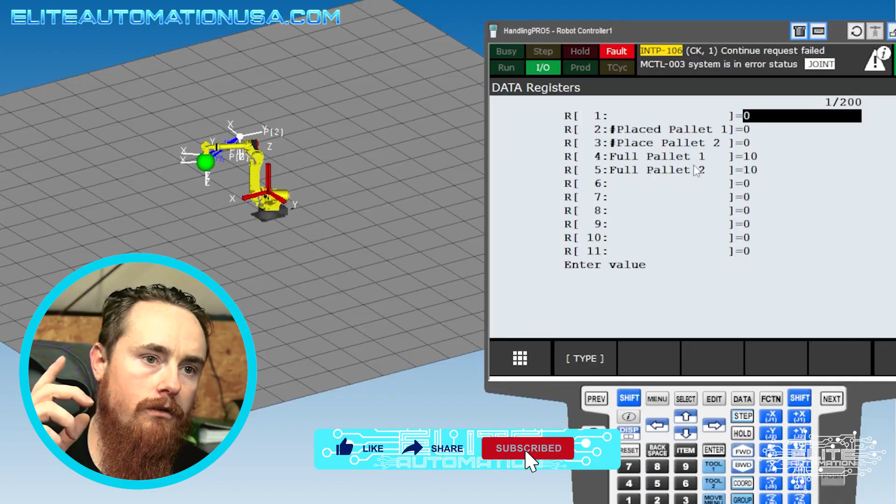This video is going to be just a crash course on Roboguide. We're going to go through all different types of things. It'll have a title that matches what we're going to talk about and multiple different titles to go with it. So we'll look at this program. One premise that we have of this program right now, we're just creating some generic loops.

The other thing is for a premise, if you go to data, you will see the registers menu. If you don't see registers, you might have to hit type. Make sure your shift key is off, hit type, and then click registers here if you're not on the screen already. But we created a couple of register descriptions here, placed pallet 1 and placed pallet 2, full pallet 1, full

pallet 2. And so register number 2 and 3 will be number placed on the pallet. So we're going to use these as counting registers. So we will basically increment every time the robot does a place to pallet operation. And so there's 2 pallets. So that's why we're placing to pallet 1 and then we're placing to pallet 2. Then we have the full pallet 1 and the full pallet 2.

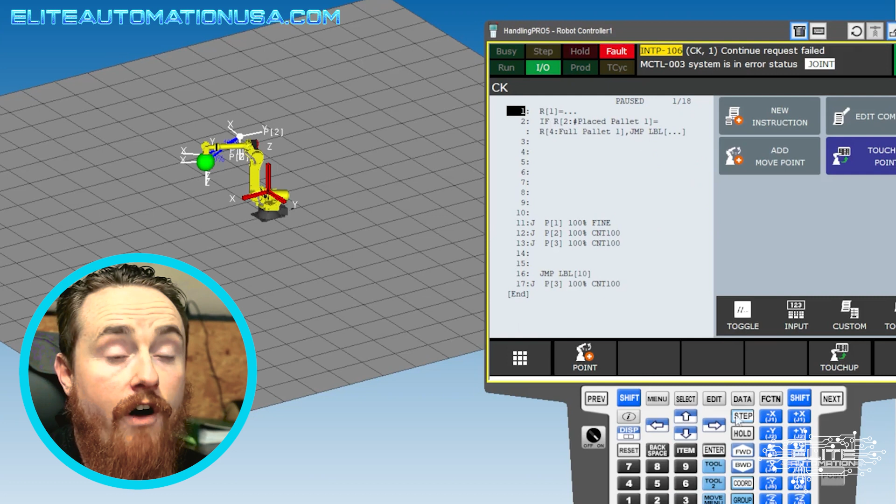Now the reason why we're doing this is to have a hard set number that we can assign to what is a full pallet, but also it's to show an example of utilizing registers. So, to try to give an example of what a register is and what the purpose of a register is. That's one of the biggest challenges with all this, figuring out what's the purpose and use case for these different tools like registers, digital inputs and outputs, group inputs and outputs, things like that.

And so in this instance, we're calling a full pallet 10, a stack of 10. So we'll stack, let's say 10 high, and then we'll move over to the next pallet and stack 10 more. Maybe we'll write a program that does something similar to that. Oh, so to delete an instruction, you have to go back to your line number over here. Then after you're on your line number, now you can go and change your teach pendant screen to edit command, delete. So go ahead and go back up to this if statement right here.

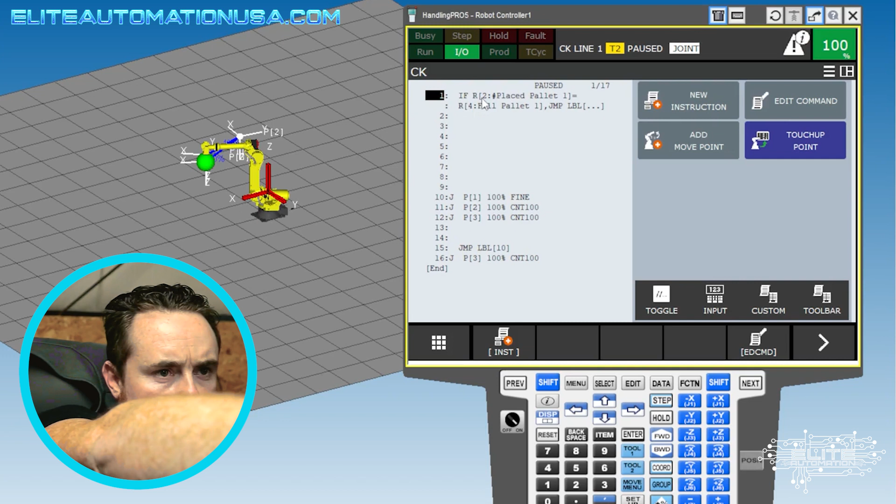So one of the thought processes with this if statement was we're looking at how many numbers of parts have we placed to the pallet, and then we are saying equal to full pallet. So notice the full pallet we set as a 10. And so one thing that could be done differently here is that this register 4, we could have just said equal to 10. So we could have said register 2 equal to 10, jump to label. But we didn't do that.

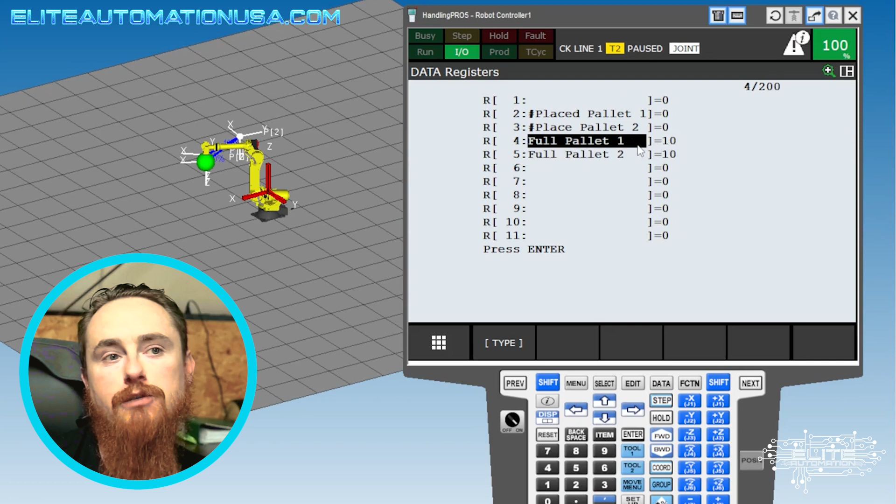And part of the reason why is it's not always the best programming practice, and you kind of have to determine when's the right time to do certain things. In this particular instance, we're using register 2 equal to register 4 to demonstrate the utilization of a register. And then to give another real-world example of why you may do something like this, you might have somewhere else in another program writing what a full pallet is. So you might have a PLC saying, this is the recipe value for this part number that we're running. Maybe you have boxes that you're stacking.

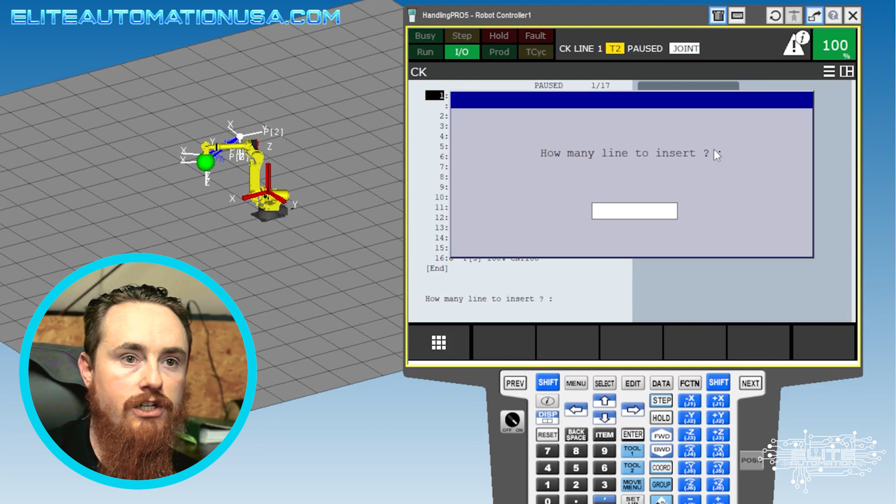It may be different size boxes. Maybe the big box you only stack 5 of them. Maybe the medium-sized box you can stack 10, and maybe the small box you can stack 20. So the PLC passes that information. The operator sets on the HMI, I want to run part number medium box. And so part number medium box is then told to the PLC. The PLC then passes a 10 for the full pallet amount. So we're just pretending that this value came from a PLC.

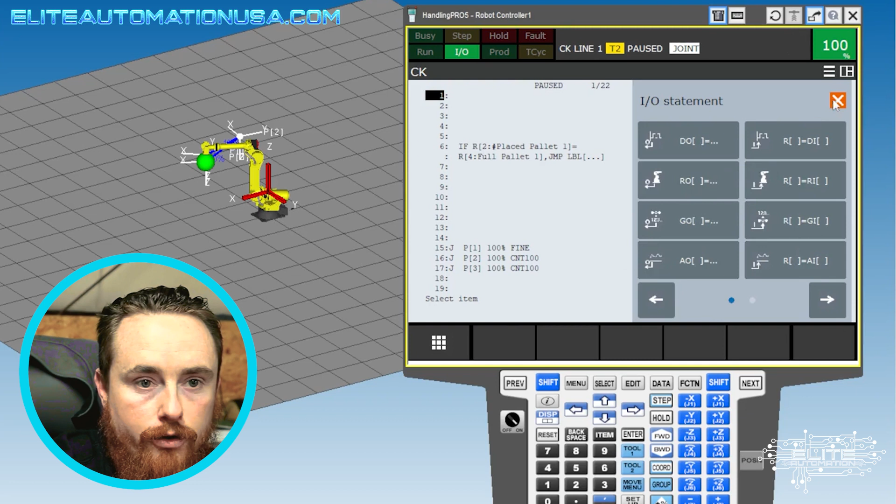And let me just write a quick example of what that would look like. So this is very useful, and you would definitely utilize something like this. Now a lot of times you do this in a different program. You wouldn't do this in the program that we're doing it in. And you just do that for programming practices. So we're going to insert some lines, 5 lines. And Gene, I'm just going to do this demonstration, and then I'll let you take back over again. So we're going to use the I/O.

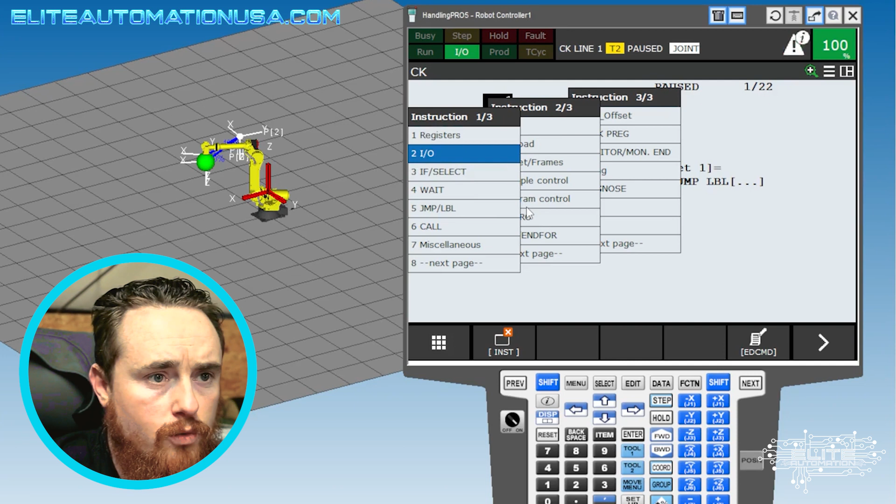Notice in these I/Os you have different types of I/Os: digital outputs, robot outputs, group outputs. By the way, that's the icon mode versus non-icon mode. Icon mode is like a newer user interface for the Fanuc robot, but almost all robots utilize this standard menuing system. What is it for? It's just a different layout. One's more of like a push button style, and the other is more of just a menu system. They're both menu systems, but this one's just a more generic version.

But this is what I'm used to programming on, and every single Fanuc robot will have this exact same menuing system for like the past 30 years. There might be stuff missing there, or there might be additional stuff now, but it's pretty much the exact same layout. Versus the other one, something that just got released. I mean, maybe it's been like 8 years now, but I still don't use it.

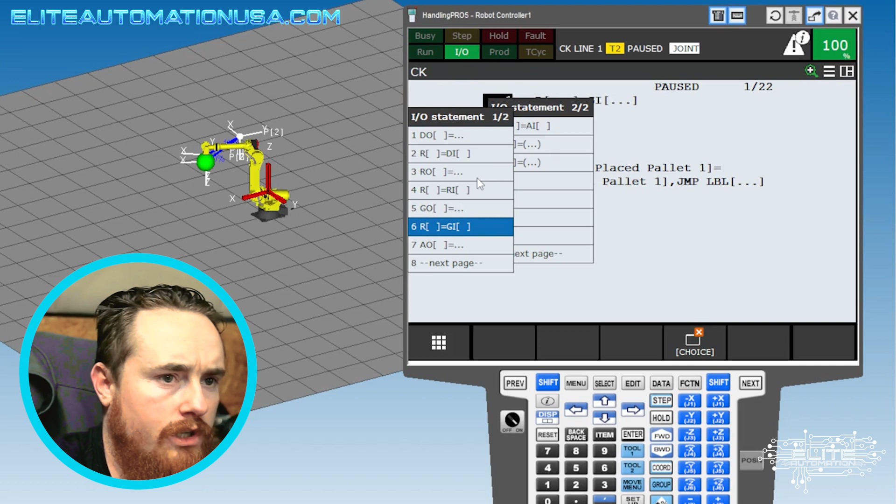So we're gonna go over to instruction. Then we're gonna go to the I/O. And if I'm not mistaken, this may not be available in some of the older programs, but this is now available as its own separate instruction. So register is equal to group input. So instruction, I/O, and then we will go down here to the register equal to group input.

So a group input would be what's utilized from the PLC. I won't say that you can't directly write to a register, but it's a lot less common practice. In almost all applications, you don't directly write to the registers. You write to a group input, and then you pass that group input data to the register, which is exactly what we're doing here. We have our full pallet amount, which is 10. So a full pallet amount is on register 4. And I'm pulling this information from right here, and over here in our data menu, register 4 pallet 1 full.

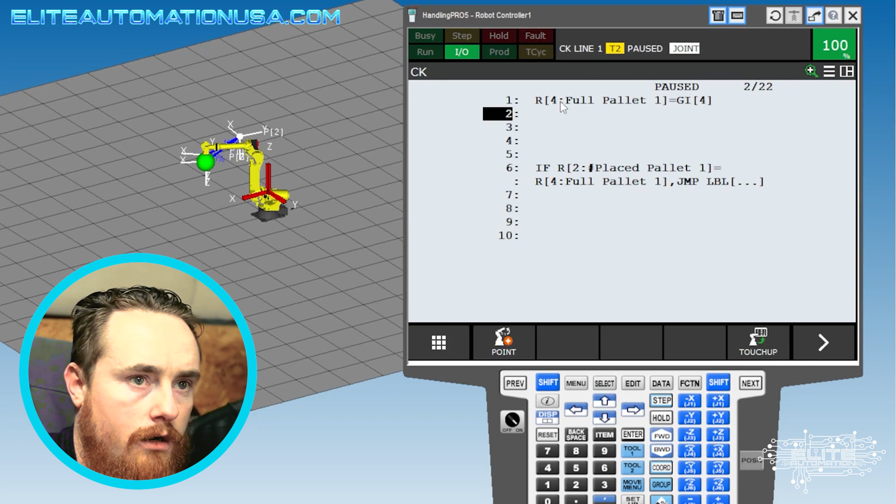Going back to our program, select enter. And then here, we're gonna set this register. This register should be 4. Yep. And then this group input, just for easy number's sake, and you should try to do this as much as you can in your programs, we'll make group input 4 as well. So you should create as much alignment in your programming as possible.

A lot of times in programming, you'll program in increments of 10s or 5s, so that way maybe register 10 will align with your group input 10, and you can have code that relates to one another in a relatable area. Or even if they can't be in the same data numbering system, because there's already something there, you at least want to keep all your data that's relative to one another close to each other. To give a more clear example, we use 2, 3, 4, and 5 all as our pallet place data. So that's pallet 1, pallet 2 data, and we have it all chunked together.

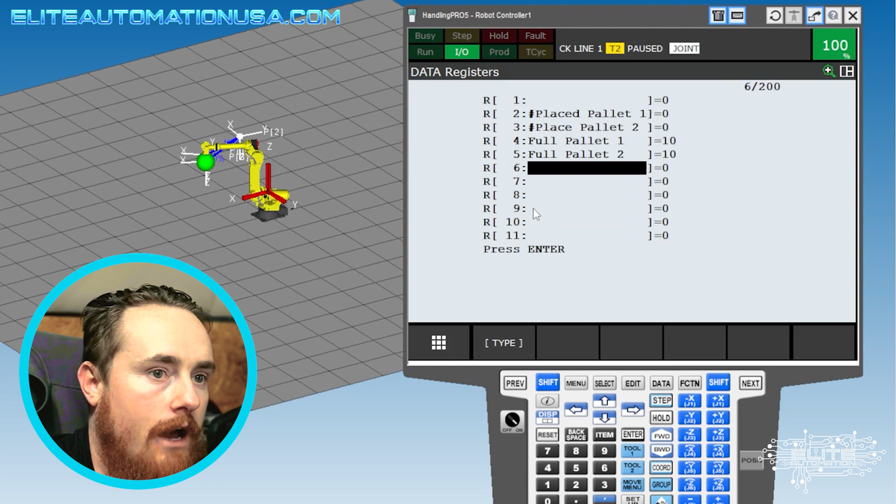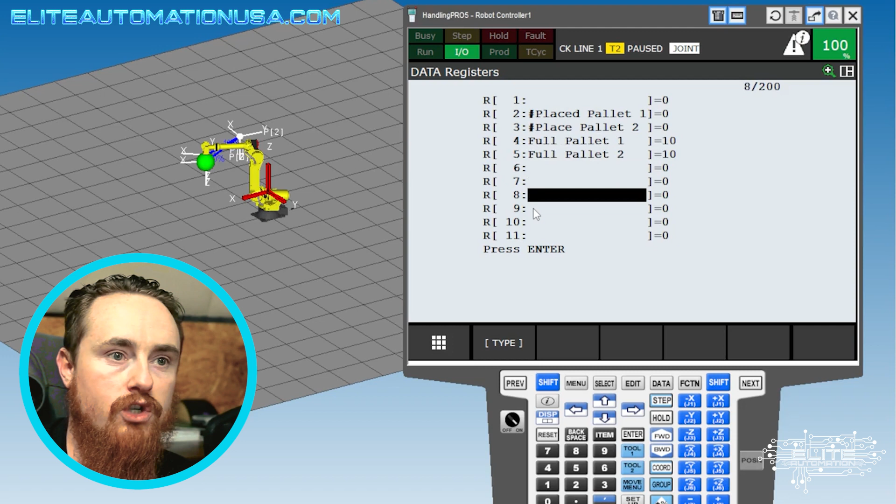You don't want to put full pallet way down here at line number 27 and then put another one here. You don't ever just choose random numbers. You always just select a number. Either you start at a 10 and go 10, 20, 30, 40, or you can do it by 5s. And you'll also do this depending on how much data you think you'll need. For instance, I'll say, okay, we only need 4 data points, so I'll only allocate 5 data points for this section.

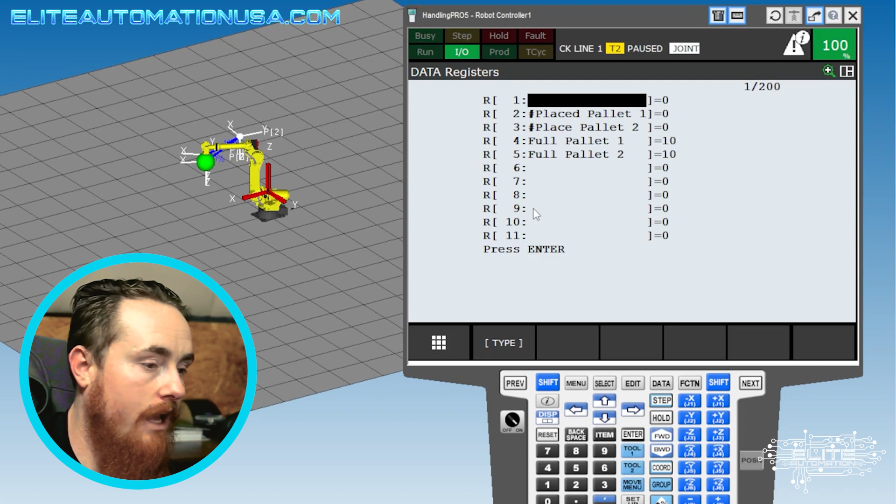But let's say we're talking about pallet 1 and pallet 2 here, and we had 10 pallets. We have 2 data points for each pallet, which means we need a total of, with 10 pallets, 20 data points. So we would know that we need 20 data points of space. If I started at 10, we would need to allocate all the way up to 30. That means don't put anything else in between 10 and 30, because we're gonna need that for our 10 pallets, if we're just pretending that we had 10 pallets.

So this is like a data organization thing, and it's extremely important to have this in mind while creating your programming and creating your data structures. The way that you can create your data structures is to identify the different parts of the application. So if you have a place pallet, how many place pallets do we have?

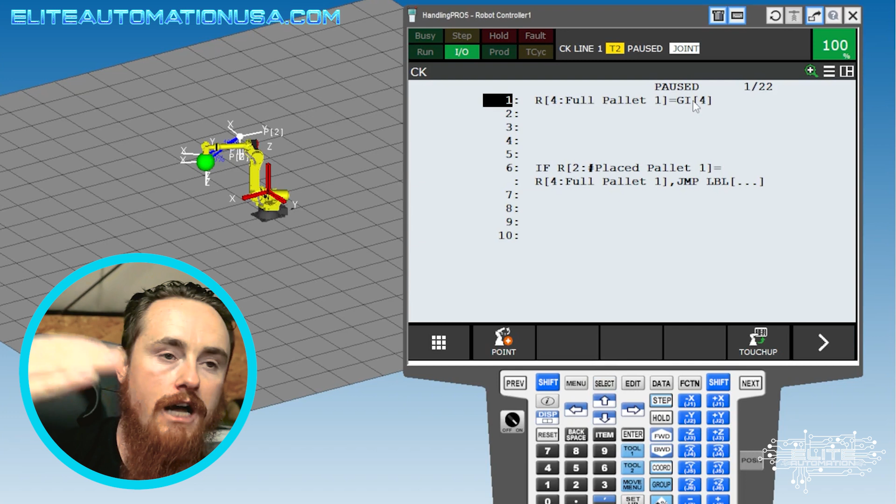Okay, we have 2. Do you have a pickup position? How many pickup positions do you have? 1 or 2. And then you can say, how many sensors do I have? So this helps you, you write all this out on paper or in a document, and then from there you can start distinguishing, oh, I'm gonna need roughly this many data points here and this many data points there, and you can create your data structure in that way.

Back to the program, so just select and then CK program. Okay, here we are. So register number 4 is equal to GI4, okay? I'm gonna go back to data. Notice we have it set to a 10. I'm gonna just do this for testing purposes. We're gonna go shift, step, forward. I guess we'll do a quick IO setup real quick.

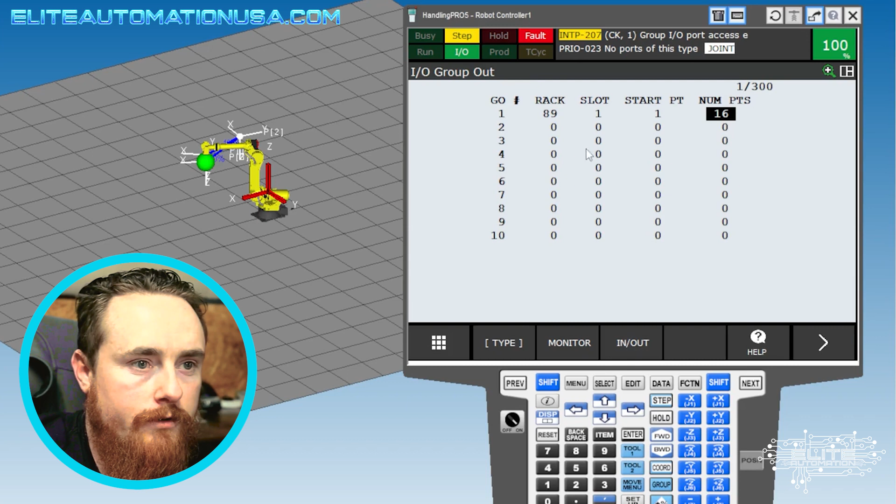So we'll go to the IO menu, type, group. So IO menu, go to type. Oh, okay, so that's why I did the type. IO menu, type. So we're inside the type menu, and then we'll 5 for group. Okay. I'm not gonna expect anybody to know this, but I just happen to know I can do like

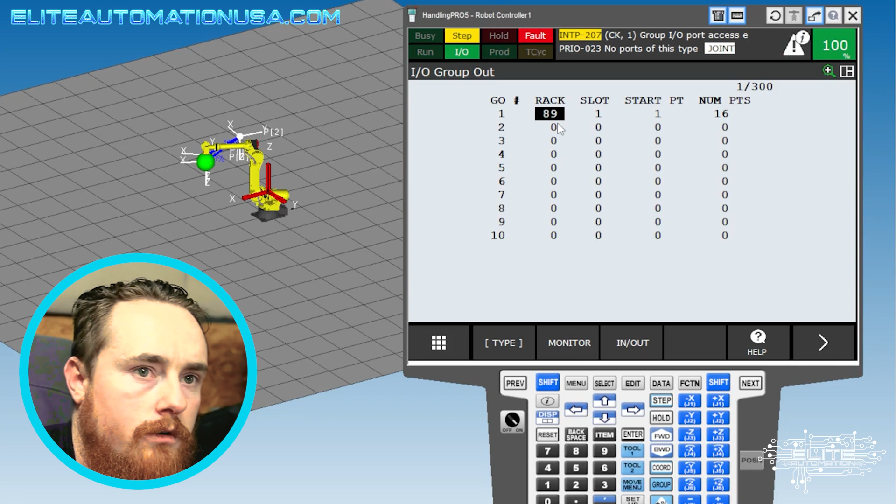rack 1, slot, oh wait, hold on, I think I got that backwards. I think it's rack 89. Slot 1, start point 1, number of points, 16. I can't really explain to you what I'm doing right here because there's a lot that's going on here. So where'd you get that number 89 from?

My brain, memory. But I'll tell you, when I say rack 89, it means Ethernet IP. I got you. Okay, so that means the robot is going to talk to a PLC via Ethernet IP. And these numbers are a hard set number. Fanuc tells you if you're going to talk to it via Ethernet, use rack 89.

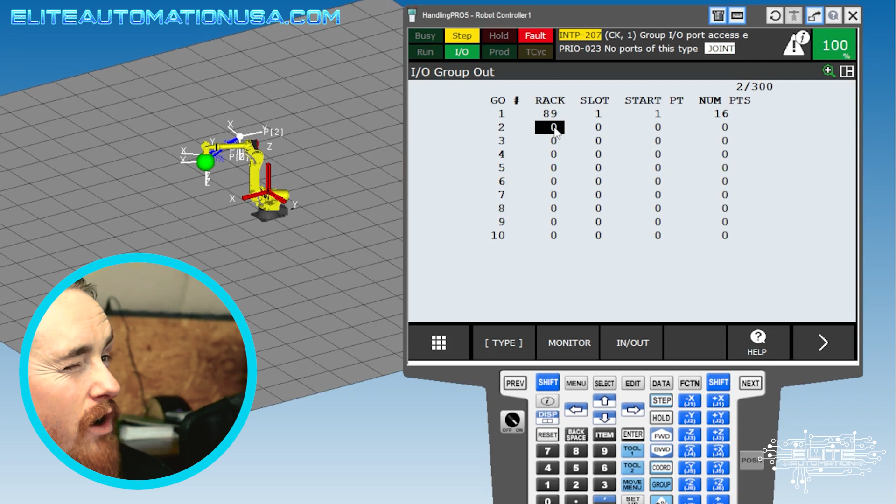Another time where you'll have different rack instances, I don't know these off the top of my head, but if you had a physical input card that had wires running into it, or a physical output card with wires running into it, those have their own rack number. So if it's an input card, I'll just say a random number, it's rack number 5. If it's an output card, it's rack number 6, like that.

And also, I had to refresh my memory, the rack number for the cards that are actually on the robot might be based on where they're actually slotted in the rack, potentially. Or the physical rack itself might have its own number, and then you just change what slot number it is. So you'd have a physical rack in there, like of a PLC basically. It's like PLC I/O, but a little bit different.

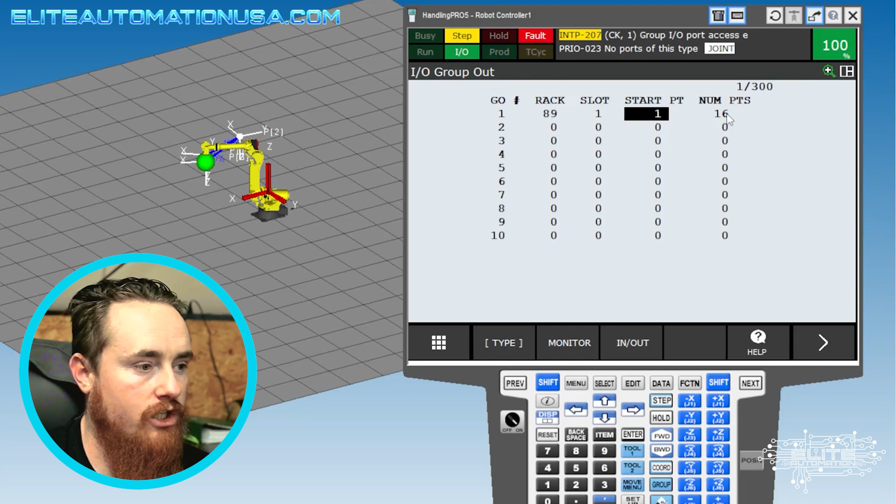You might have a single rack number for that entire rack, and then you would say what slot number. So if it was an input card, you may say slot 1 here, and the next one would be slot 2, slot 3, slot 4, okay? And then you're saying digitally, where do you want to assign this? Meaning, how much memory of the robot's computer do you want to take up, and where should it start?

So if we're talking about a number from 0 to infinity, I'm telling it I want to start at 1, right? And then how many inputs do we want to use? We want to use 16. And then, let's say for the next one, how I would do this one would be 89, slot 1. I might get this wrong because it's been a little bit of time since I've done this.

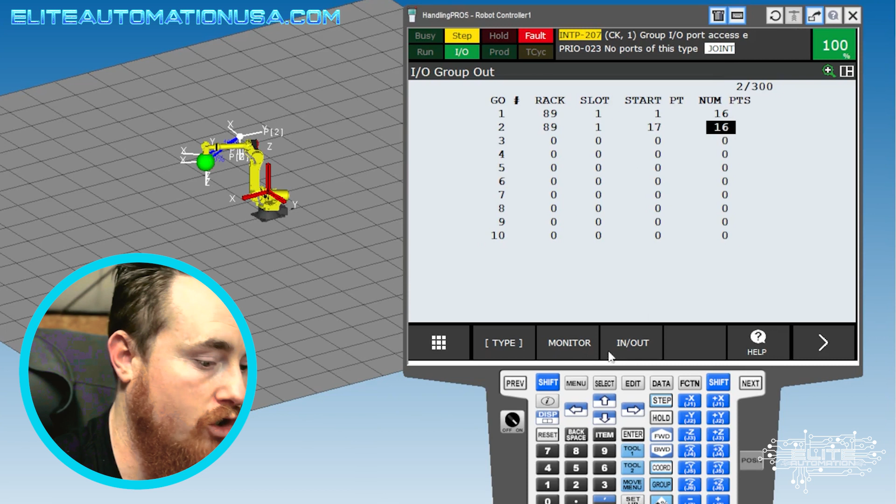So it wouldn't be a start point of 1 anymore. The reason why is because this is consuming 16. So we're starting at 1, it's going to consume 16 points. That means the next one has to start at 17. This one will also consume 16 points because it's group output data. So the group input data needs to be either an 8, 16, 32. I think it can only go to a 16 though.

But yeah, so that should be set there. So we don't have any set here either, so I'll just do the same thing. 89, slot... oh shoot. Slot 1, start point 1, number of points, 16.

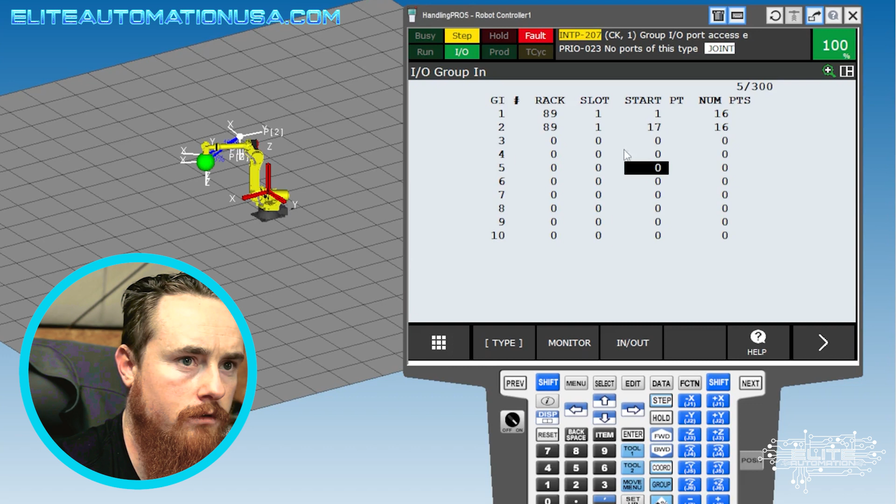And if I'm not mistaken, we're going to have to cycle power the robot after this. 89, slot 1, start point 17, and it's 16 points. Not positive. So you have the ability to cycle power your robot from here.

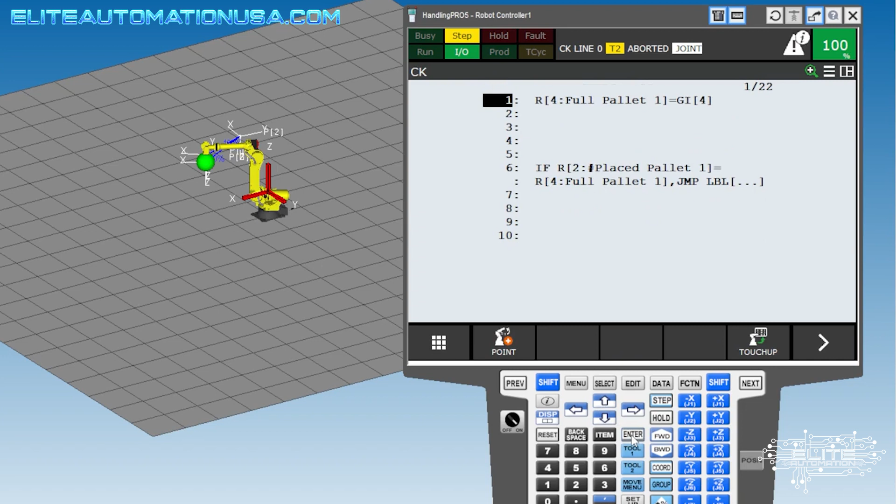Function, go over to this menu system, cycle power. This will cycle the power. Are you sure you want to do this? Yes. So it's going to cycle the power of the robot as if it were a real robot. You turn the controller off, turn the controller back on. Reset it. Yeah, cycle the power always means to turn it off, turn it back on.

So basically we're just going to change this back to what it was. Full pallet 1. I'm going to do something kind of silly just to do what I was trying to do, but do it extremely generically.

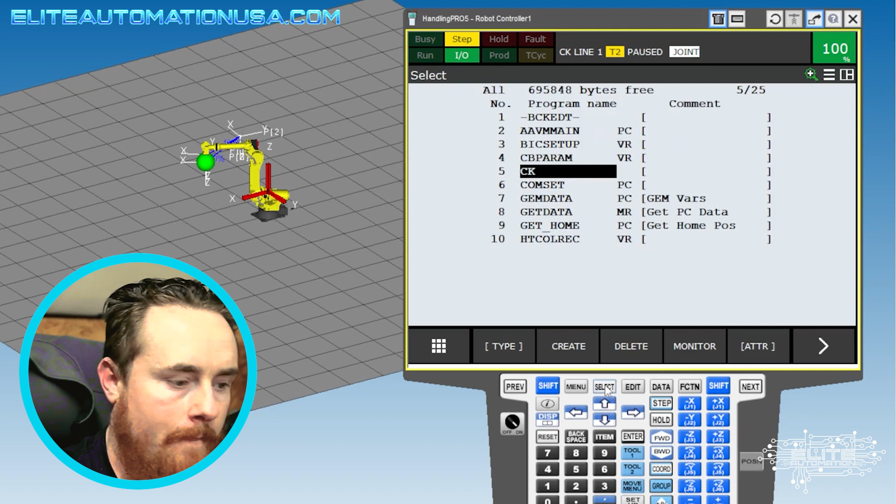We're going to say... option, keyboard, GI2 sim. So the reason why I did this is because we're going to act like this is a group input, because really there is no difference in the way that these act, at least at a surface level. We'll do GI3 sim, again, to match our register 2 and our register 3.

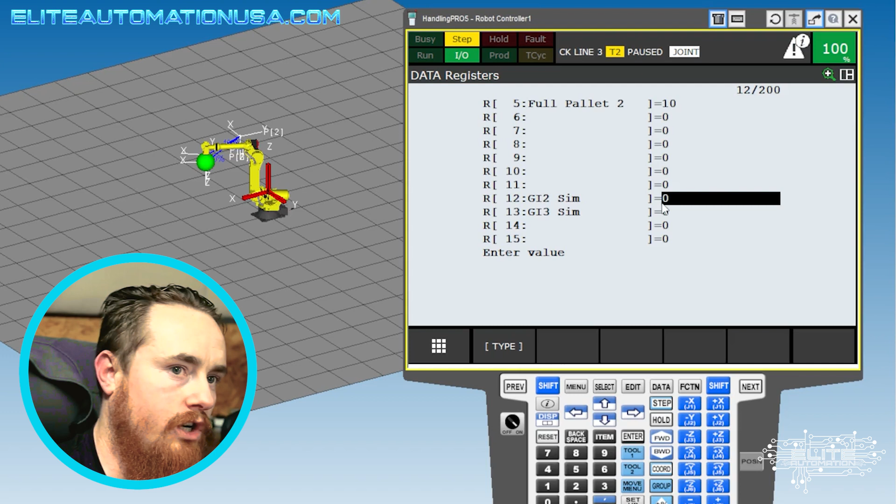So I'll go back to the program. Again, since I can't use this GI, we're going to change this GI back to a register, and then we're going to use my GI2 sim. So now, when we run this program, I'll just run a quick test - shift, let's go look at data first. So you see our data, we have 10 and 10 set. Back to our program, shift, forward, okay, go back to our data.

Notice one of our 10s got shoved to a 0. How is that? Because down here, our register 12 is a 0. So let's just say, for this instance, the PLC sent it a 0 for some reason. So we're acting like the GI2 is coming from the PLC. Let's say, I was given the example of a small box or a big box - we can only stack 5 of them there, and a big box we can stack 10.

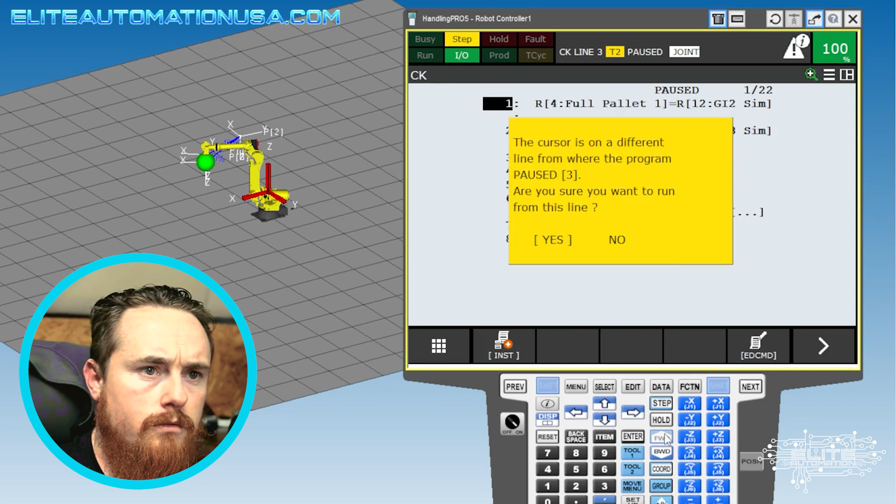So these are coming from the PLC, and I'll just go ahead and write this out real quick. Edit instruction, register equals register. We'll do register 5 is equal to register 13. I'll use this one up here, which is our GI3 sim.

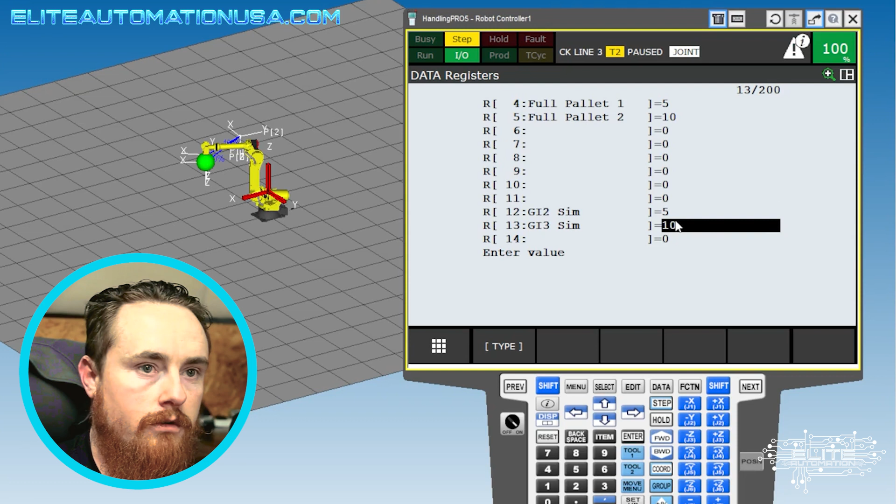So now if I come back up here to the top again, shift, forward, yes, forward. Now we go look at our data. You can see that 5 and 10 data has been shoved over here to pallet 1 and pallet 2. And so I can change these numbers to whatever, and then if we run that code, it'll change these numbers to whatever, right?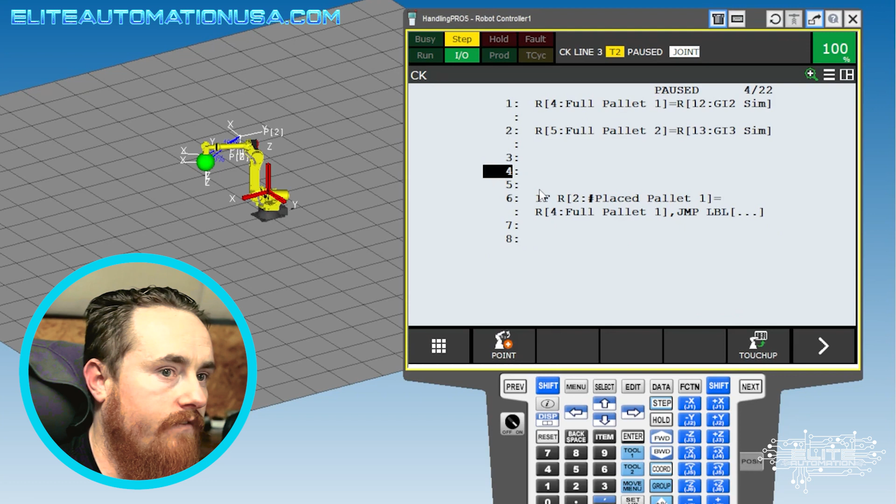So in this instance, like the example I said with recipes, the PLC would send a value. If pallet 1 needed to be big boxes, it would send the robot a 5 for big boxes, because we're only going to stack 5 boxes of big boxes. And the PLC would send it a 10 for medium boxes, because we're going to stack 10 high for medium boxes.

So if you were to switch this jump label with this label, okay, now we're going to pretend this is jump label. You would run through this code, you'd get to here, it would say jump to label 10, which means it would jump all the way down here. And so you skipped all this code - it says boop, and jumps right past it. So you're jumping past lines of code.

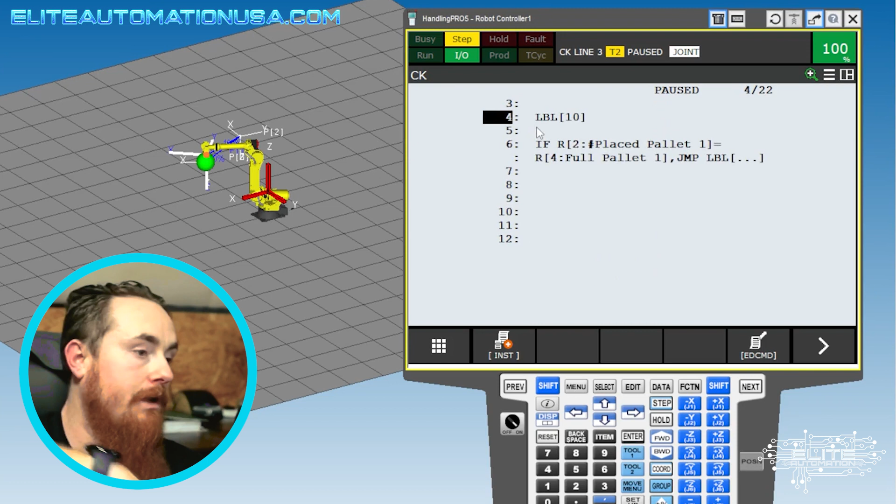Whenever you jump up towards something, whenever you jump from the bottom to the top, it's generally for a loop. If you're jumping from the top to the bottom, you're generally jumping to different portions of code, or skipping portions of code - one of the two.

Okay, so now we're going to go ahead and finish out this one here that you were doing, that you're saying if it's a full pallet, jump to label. So we don't know where we're going to jump at yet, but let's just go ahead and add a generic label down here at the bottom.

So, instruction. When I say generic label, I mean we don't have a purpose for it yet, but we need to create one to move forward. Just make it, this is at the very bottom of the program for right now, so just make it 90.

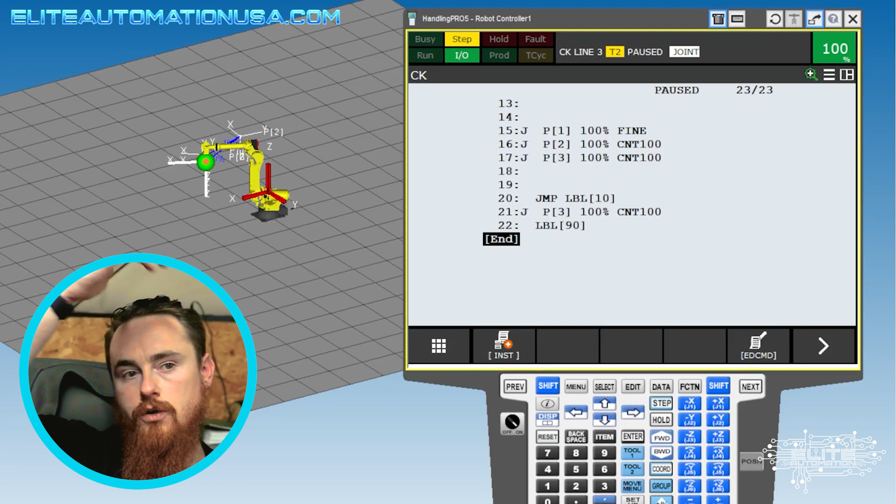As I mentioned before in other videos, labels closer to the top I generally do at like 10, and other labels down at the bottom at 90. If for some odd reason I think a program will be extremely large, then I might do 100s, so I'll have 100, 200, 300, 400, 500. But I generally only do that on a very, very large program.

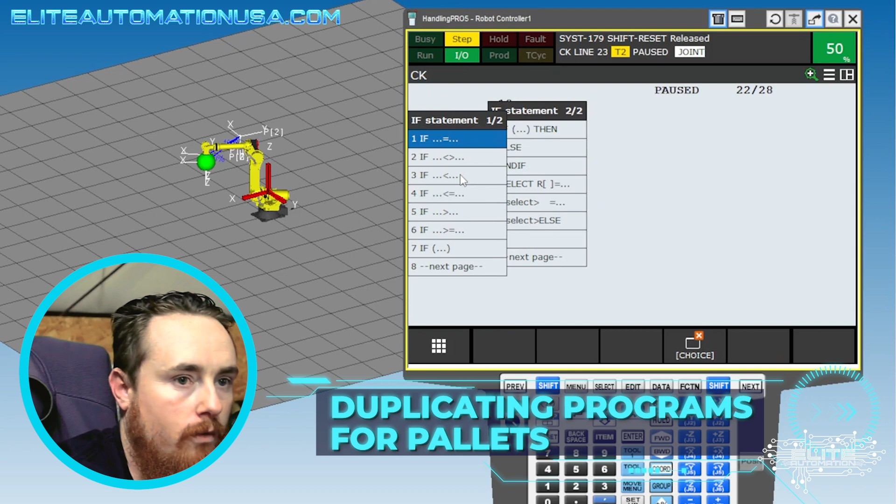It doesn't seem like we're writing code to do just one little pickup thing, right? You have a pickup, you have a place, and this is just for one part number. What if you have 10 part numbers? So you created the first part of the program for pallet 1. We're basically just going to reduplicate what we did for pallet 1 for pallet 2.

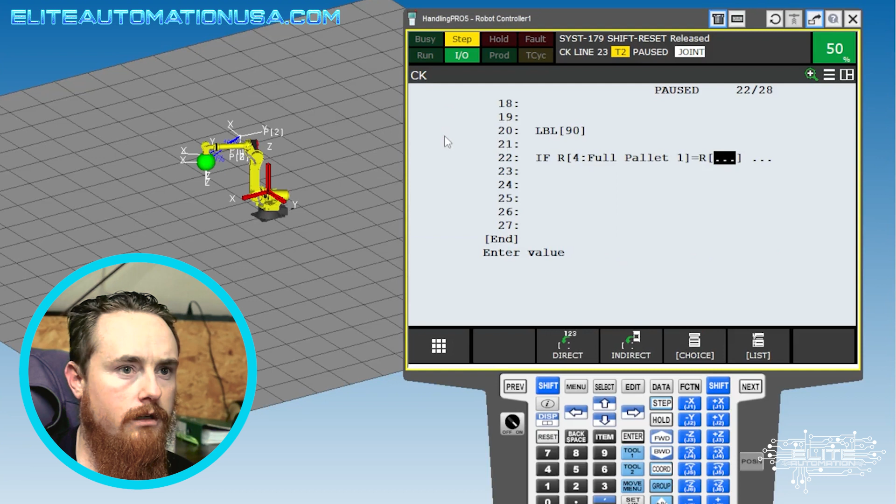Okay, so we're going to start off with just this if statement. Go instruction. Number 3, if. And then this one should be if equal, yep. This one? No. Yep, okay. So if register, yep.

I think we used 3 the first time, so I think this one will be 4. No, this one will be 4. Equal, yeah, enter. Register. And then this one I think was 13. Or no, it was 13, it was 6. I think so, 6. Oh yep, no, I was wrong. This one should have been register, it should have been 3. You had it right the first time actually.

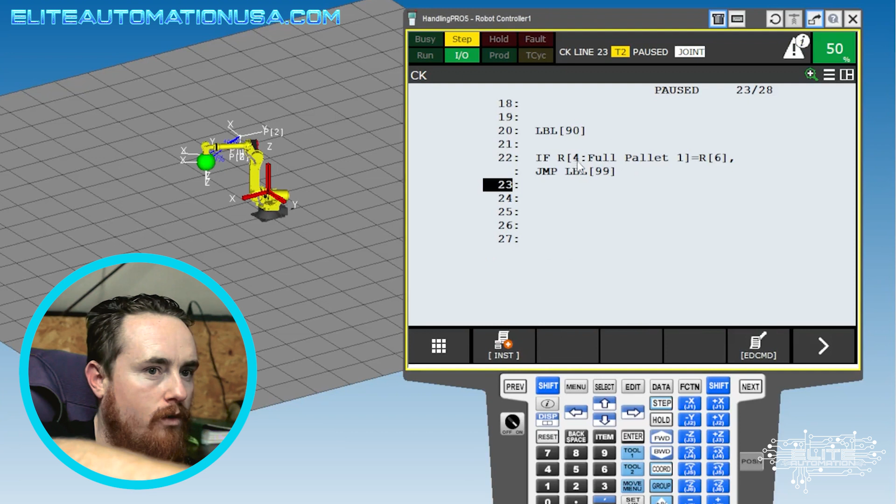So just hit previous, or go ahead and just finish it out. It'll be easier if you just finish it out and then change it. They're kind of weird when they're halfway through with editing one of these. It's better you just finish it out or start over, one of the two.

Yep, jump label. And then this one will need to be a, do 99. Okay, and then go ahead and change your if. It should have been 3, your first register should have been 3. Yeah, pallet 2, and then that should be 5. Yeah, 5. So if the number placed on pallet 2 is equal to whatever we're saying the full amount is, jump to label 99.

Okay, so next you just need to go ahead and go down like one line, and then you need to record a couple positions. So go to position, hit your little next button, yeah that one. Position, joint is fine. Yeah, just do a joint fine.

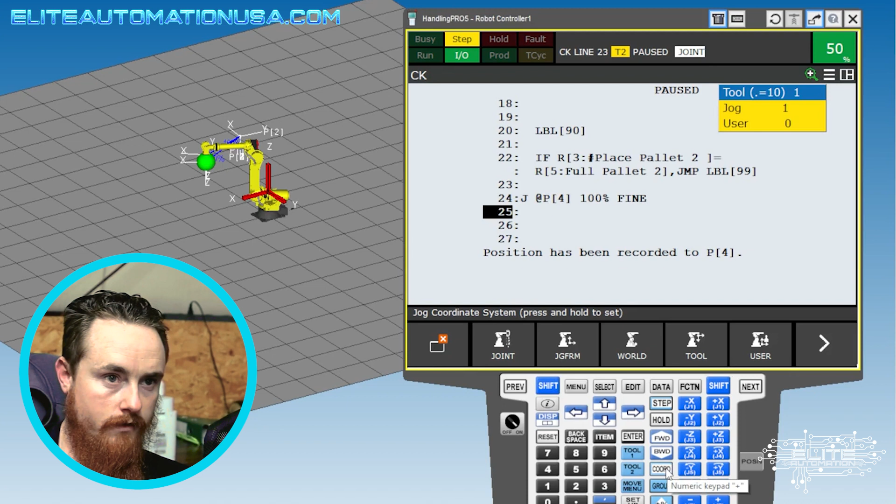It's okay. And then go ahead and shift and then jog down minus Z. Okay, actually hit the shift button again. Hit the coordinate button. Okay, see up there at the top, it's telling you what frame you're in, joint or world, right? So now you're in world. World gives you the triad, and you move in a linear motion.

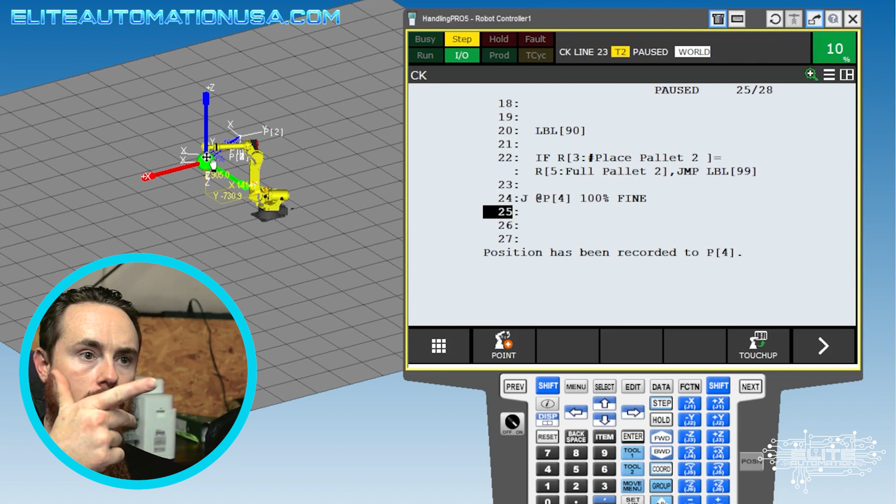And you can see it directly from the robot right now. X is this direction, and so you'll use the right hand rule, which means you do your hand like this, and then you point this finger away from the face of the robot, or the way away from the front of the robot. X positive will be away from the robot's base in the front, and then Y positive will be to the left of the robot's base, and Z positive will be up from the robot's base.

So we can see the same thing here with this triad. This is what would be considered the front of the base of the robot. So your right hand rule should always go like this, so like this to match, and you should face... I'm turning my hand like this because that's exactly how it should be, you know what I mean? Because that's where the face of the robot is, right here. And you can see it right here too, it tells you, see how there's a Z positive, X positive, Y positive. So I can grab this, move it.

Okay, now we'll just record a second point there. Just make it a fine, we don't really care about that right now. And maybe we'll do a third point and make this go in a little bit.

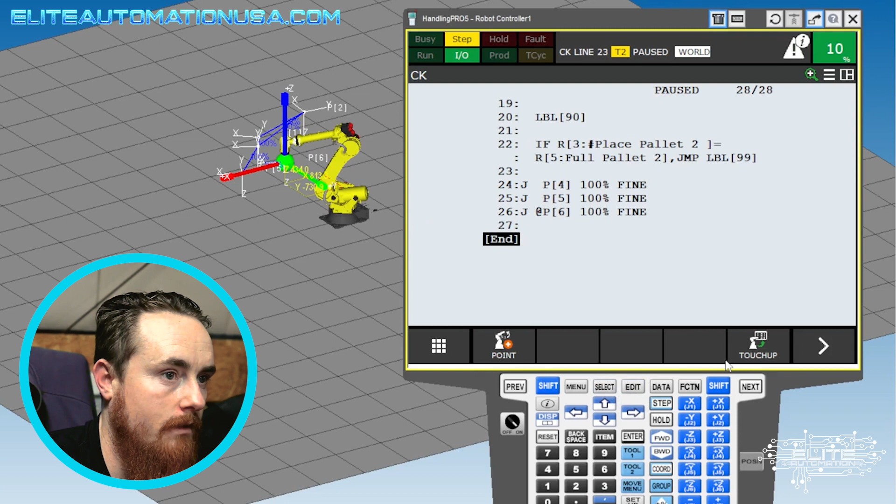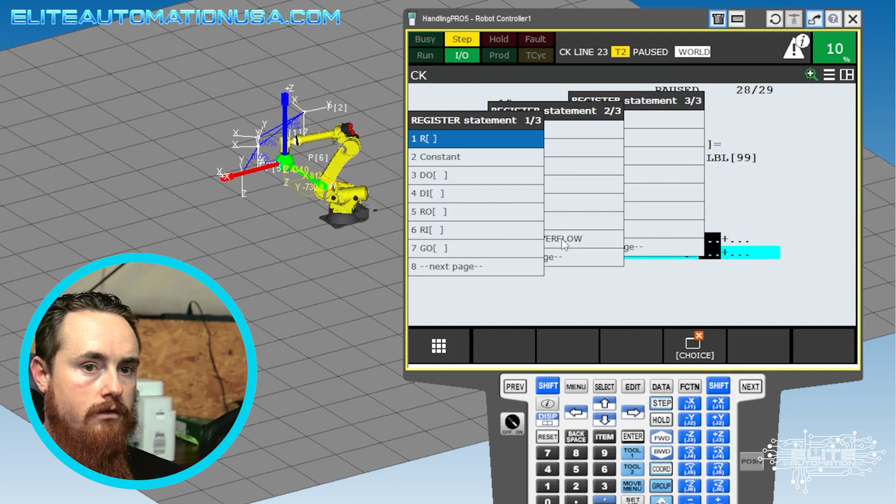The math function will be your register equal to register plus. Hit your next button. Instruction.

Yep, registers. And then you want number 2 equal to. So register, yep, first one. This one was 3.

Yep, again, register 3. So this is just the way you increment up in a robot. Enter.

And then 2 for the constant. And then make it a 1. Yep. And then enter.

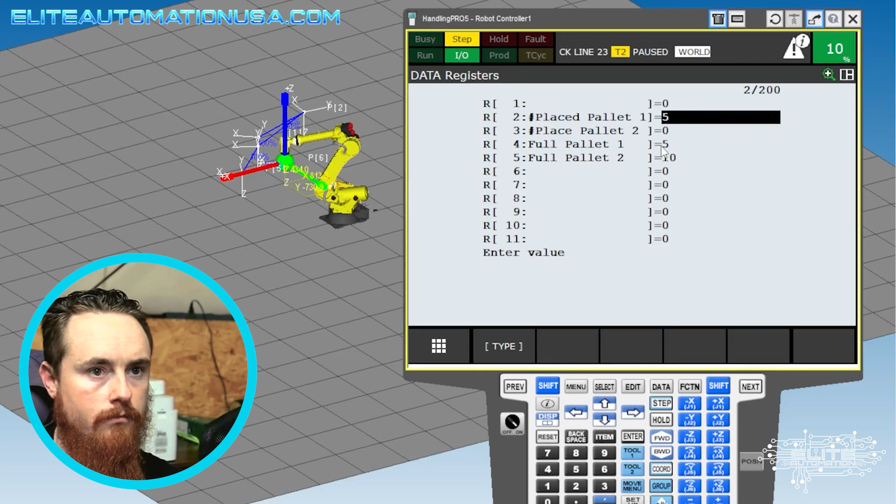Okay, so now you created your increment. So this is going to increment your register 3. On the last one, this one was 5, right? Nope, which one was it where if you reach 5, you start over to 10? That's your full register. So going back to data.

Where'd our mouse go? There it is. So going back to data, full pallet 1 was 5.

Okay, and that's just a hard set value. We're not changing this value. We're just saying it's set. I got you, oh okay. No, number 10, the second pallet is 10. If it's full, it's 10.

Okay, yep. And so again, like for this example, we're saying 5 would be a large size box, so you can only fit 5 of them on a pallet. 10 would be the medium sized box because you can only fit 10 of them on a pallet. And then for a small box, you could fit 20 of them on a pallet, just for example.

Well, now we're not doing that example now, with the 20, but to follow that same concept. So now you have the math. Go ahead and go down. There's one thing that you're still missing from this program.

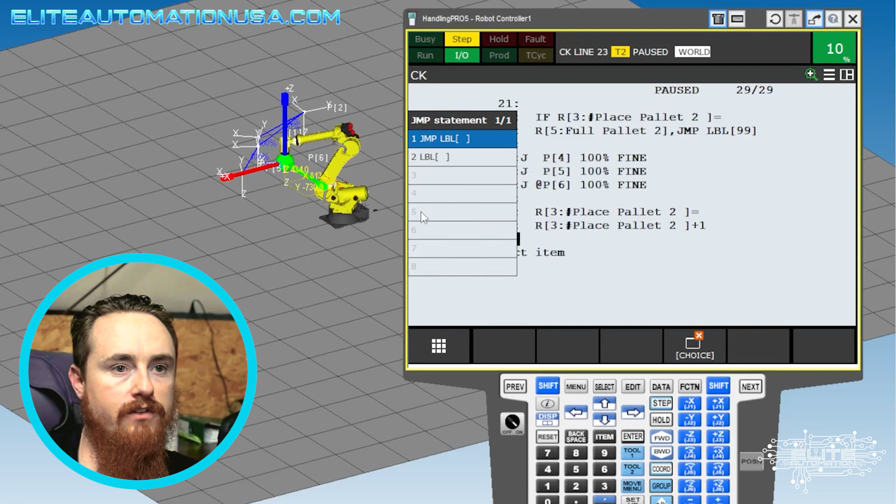A couple things actually. The first thing you need is your label 99. So up here in line 22, you're jumping to label 99, but you don't have a label 99. So you have to create a label 99. So, instruction.

Label, number 5. Label, yep, 99.

So we will basically be doing a skip. So whenever this if statement happens, you'll say if register 3 is equal to register 5, aka you have a full pallet, jump to label 99. Is it skip? We're using it as a skip because we're going to skip past all this logic, okay.

Right, it's still the instruction, it's still jump label, but how you're using it is how we're kind of saying it. Yeah, yeah. So now we're going to go, so jump label, it's going to jump to label 99, and then,

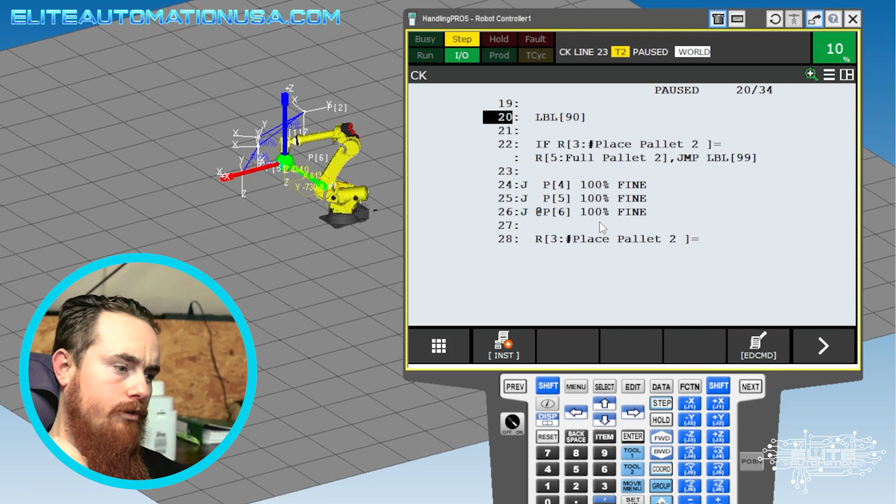So now we're going to do instruction, and we're going to add a jump. Yep. And then we're going to go jump to label 90.

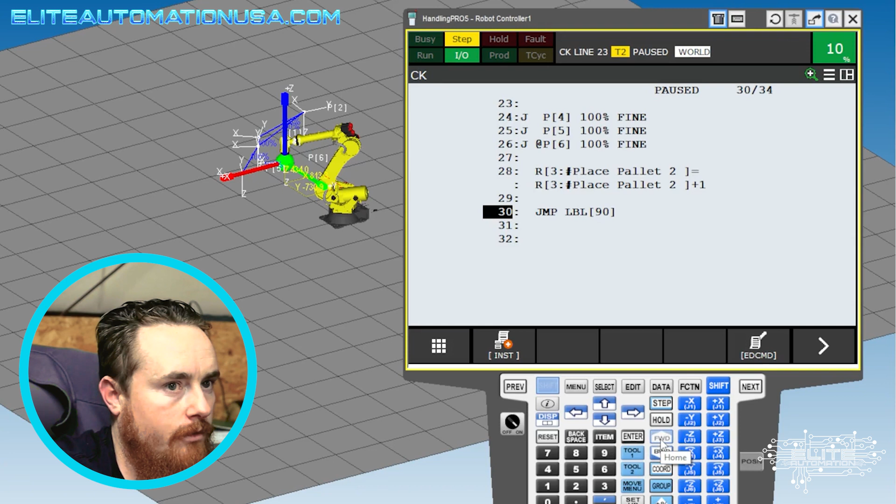And the reason for that is because we wrote all this code right here, but we don't have a loop. So whenever you say jump to label 90, you're gonna jump back up to here again. And then you'll run through this code. And then it'll jump back up to label 90, run through this code again. Okay?

So, let's go ahead and run it.

Shift forward, yep. Just hit no. We'll go ahead and go back to the top. Let's go ahead. Or do you just want to run that bottom one?

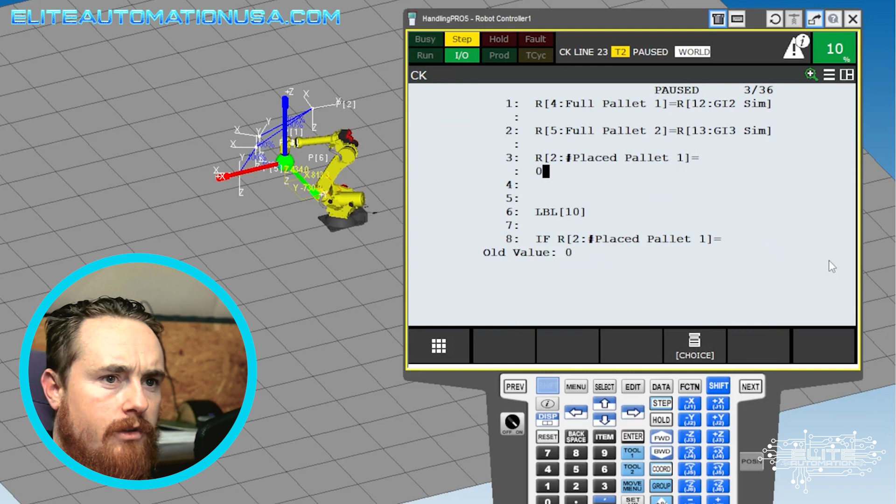So I want to add something here because something that we're not doing in this first part of this program, these 2 lines, is we're not setting our registers equal to 0, meaning...

I'll just do it and then I'll explain it. Register, and then 2, set it equal to a constant, 0.

Instruction, register, 3, constant, also a 0. Okay.

One thing I'll point out here too, just for being symmetrical, I actually should have put 2 and 3 above 4 and 5, so that way it'd be 3, 4, 5. Just for number's sake, keeping things nice and in a pattern as much as possible, the better.

So that's one thing. The other thing is, this top part of this program above label 10 is known as the init part of the program, the initiation part of the program.

So whenever we're gonna start this program for the first time, we're gonna take the values from our PLC with our generic simulation registers that we have here.

We're gonna then also set the number of parts that we've placed on a pallet to 0, right? Because we're assuming that we always start out with new pallets with nothing on them. So this will automatically wipe out the numbers. And part of the reason for that is, if you look, there's still a 5 inside of pallet 1.

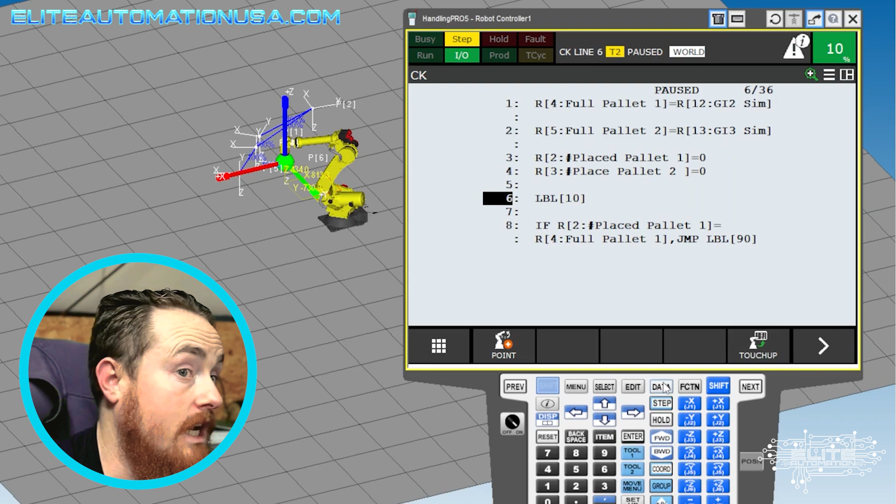If we run this code, it's immediately gonna skip pallet 1 and go to pallet 2 because it's already equal to 5, and that's what our full number is. Okay, maybe that's how you want it to act, but in this instance, we're gonna act like that's not how we want it to act.

So we'll run through this init program. The first part of it will be an init, and I'll almost always add a comment that says init at the top, or I'll have a separate program that is the init program.

Yes, forward, forward, forward. Okay, we'll look at the data to see what happens. So you can see it zeroed out those, and these values are still the same because we didn't change the values down here. So this is where it's grabbing the values.

But let's say, for instance, the PLC updated some different values. Maybe you're doing 2 medium-sized pallets or two large-sized pallets, and so it made 5 and 5. It would have updated that into here as 5 and 5. If we're pretending the PLC gave it some data. But we didn't do that, we just left them the same values. So now just kind of running through here, boom, boom, boom, where what's gonna move.

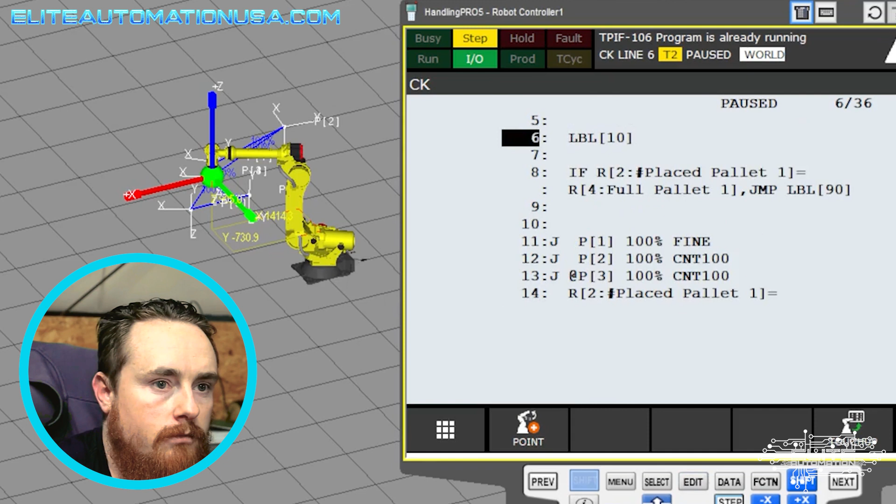Speed them up a little bit. Especially doing forward, I don't care about the positions. Now if I was gonna run this in auto, I'd slow it down so I could actually see the robot moving and see the code run a little bit better. But also if we're not forwarding, we won't see any of this. Like as soon as it does do a register or the math right here, it'll instantaneously, takes milliseconds to scan through code. It only takes motion time.

Pallet 1. So we're still on pallet 1, right? So that part just did exactly like it was supposed to. We're still on pallet 1. And if we look at our data, pallet 1's incrementing, yep.

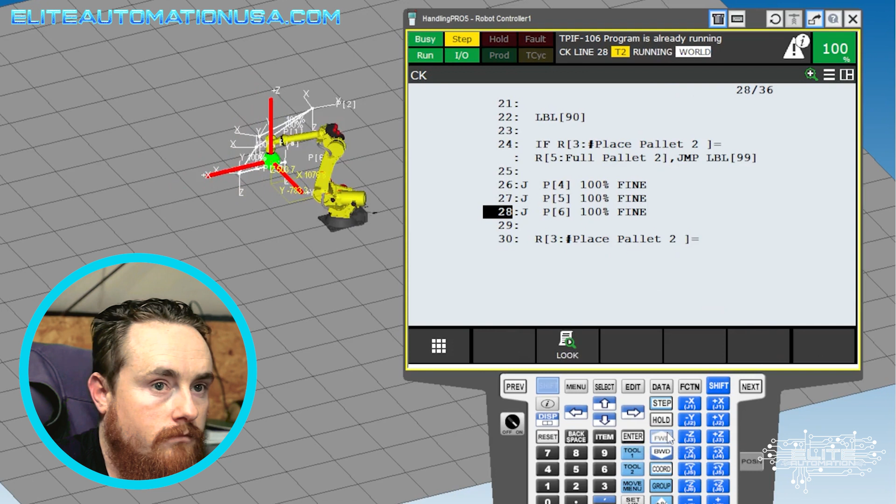Okay, now we're at pallet 2. So let's go look at our data. You see we have a 5 here and a 5 here. So that's why it moved on to pallet 2.

Forward. So now I jump back up to label 90 for pallet 2. See, we're running pallet 2 here. Look at our data and just see how it's changed. So we've ran 2 pallets, or 2 parts on pallet 2.

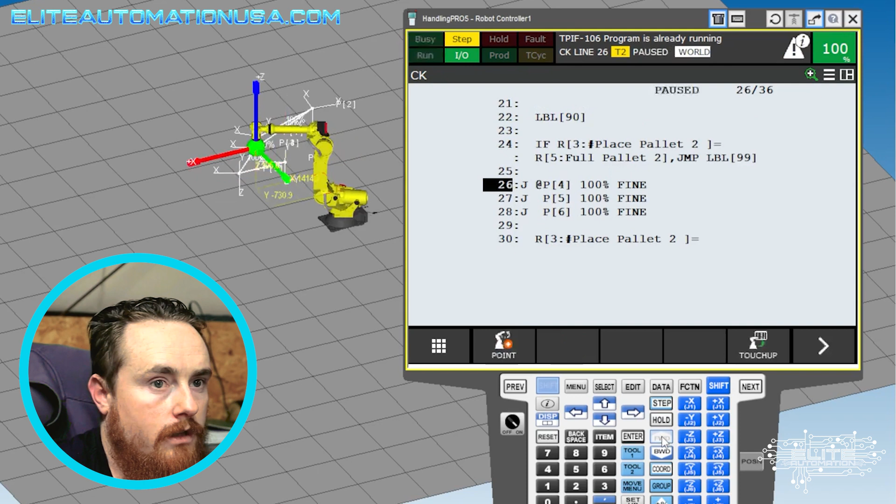Data, or not data, select. Okay. So I think that would be 4, right? I think this one's 5. Let's just check the data and see if it is.

Oh, this one's got a lot to run. We're going up to 10 on this one. So we gotta run through this one quite a few more times. I'm gonna kind of run it through as fast as I can until I get closer to that 10 value, then I'll slow down. I'm gonna be at like 8 or 9.

So we're 8 now. And we're back starting at the top, so we haven't done the math yet. So when we run through the math function, now we're at 9. We'll run through it one more time. This should be at 10.

Now see, notice I'm stopping right here because we just did the math. I want to go look at the data first. Okay, 10 and 10. So the data looks right. So now when I go back, it should execute the if statement.

So here's the if statement. If place pallet 2 is equal to full pallet 2, jump to label 99. Good. Then jump to label 99. And then from here it ended the program.

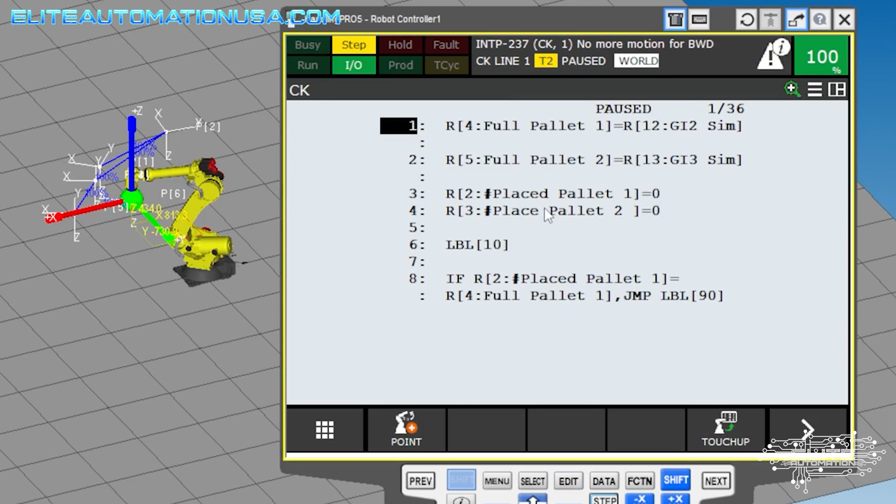One other thing to keep in mind: no robot program ever ends unless it's set up in a way where there's something that restarts the robot program. But almost always the robot program never ends, it just runs in a continuous loop, and it's just commanded to do different stuff off of that one loop. So if the robot's not being commanded to do something, it just sits there scanning in the loop, waiting. Oh, PLC said part present, go. And that will trigger the signal for the robot to go pick.

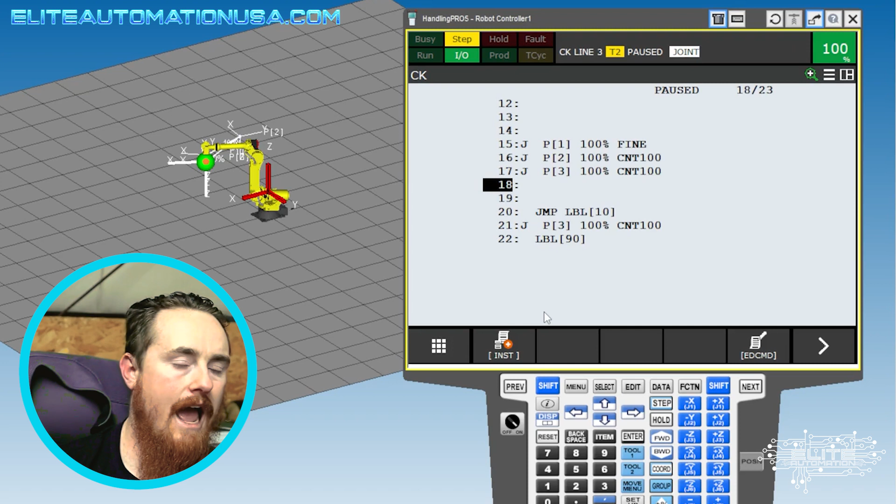Okay, now for this logic to work, go ahead and scroll down a little bit. We have to add the math, okay? So after your positions, like line 18, go ahead and go up to line 18, and we're gonna add the math, which will be like a register equal to the register plus 1. So instruction, registers equal to. Actually, you don't want it to equal to. Hit previous.

You want number 2 equals to plus... okay, register. What do we use for this? Register 2. We use register 2, if I'm not mistaken it might be enter. Register again? Yep. 2. Plus a constant. 1.

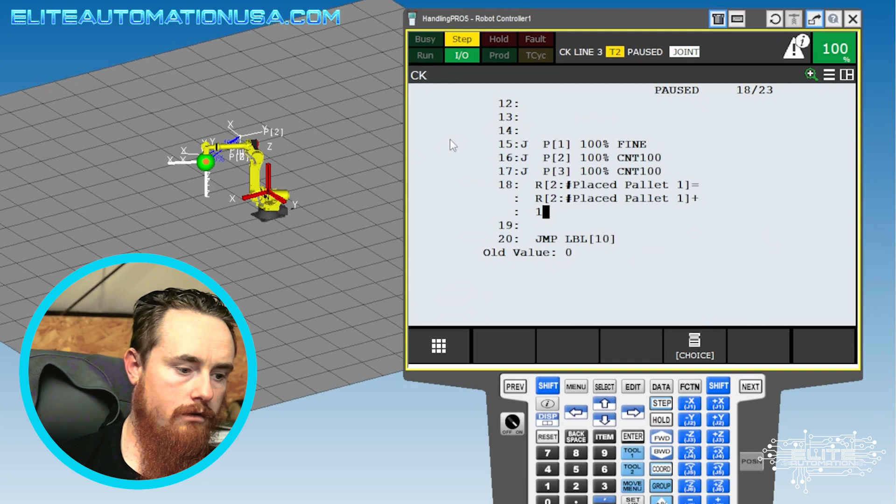Enter. So this math right here will increment up 1 every time we run this program.

Okay, so I kind of see some similarity with the PLC a little bit. When we were doing the timing, they would create a loop. I remember one program where after they reached that amount, the timing would change. I forgot exactly what it was, but it seems slightly similar to PLC, where you use a counter and then you usually use the done bit of the counter.

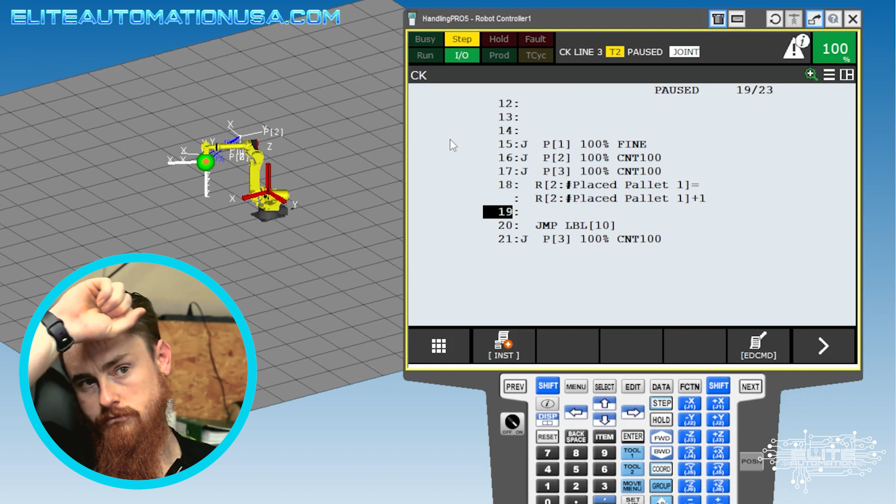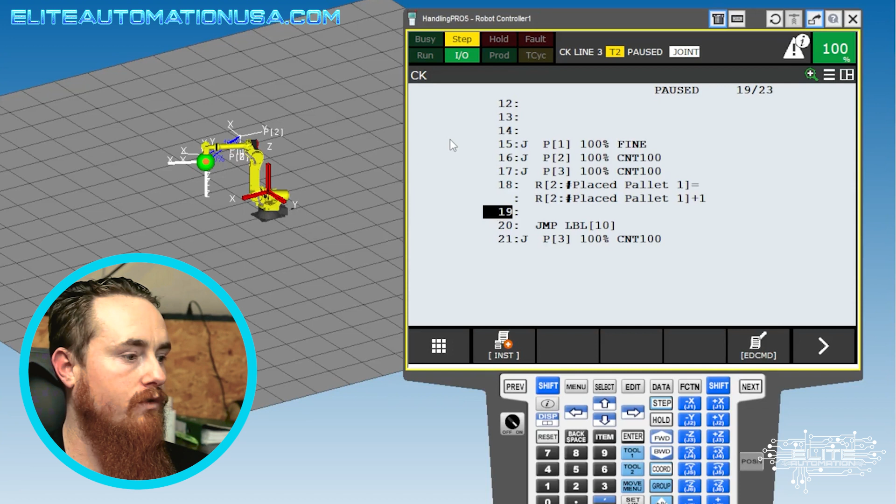I like people to learn robot first because robot is easier, it's linear code. It scans right through, you can literally just go do it and see what it does. There's not really an option to do that in PLC. The only thing you can do in PLC to kind of do the same thing is force on inputs, force off outputs. And generally everything moves so fast that the only way you can see what the program's actually doing is if you put counters in there, and then you can see, okay, that executed one time, that executed one time, all the things executed like I thought they were going to.

Okay, so this is going to be the addition math that's going to count up.

So go ahead and go back up to the top of the program.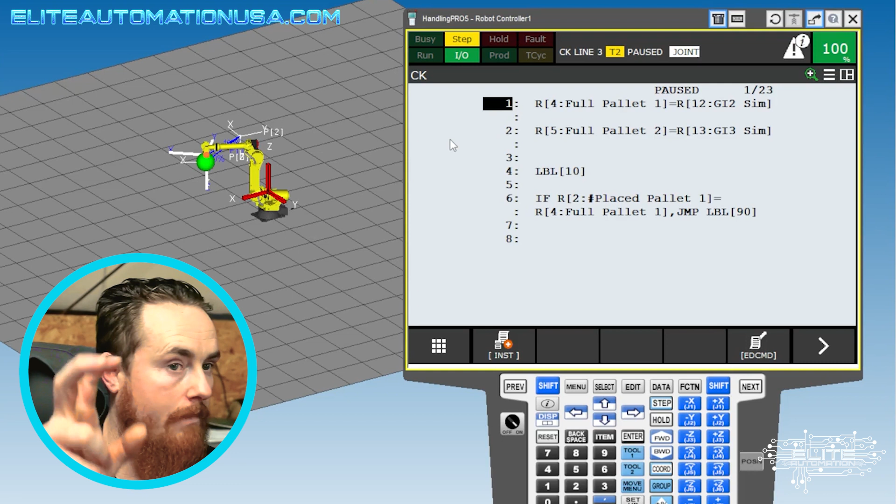So what we have right now, as of right now we're only stacking to one pallet, because you only have the positions for one pallet, and you only have the registers for one pallet. So right now we're only doing the programming for the one. So now we're going to trial this and see if it works, and then from there we can do pallet 2's logic.

So we'll just kind of forward through this program. Yep, shift forward, hit yes. Enter button. You gotta forward through it.

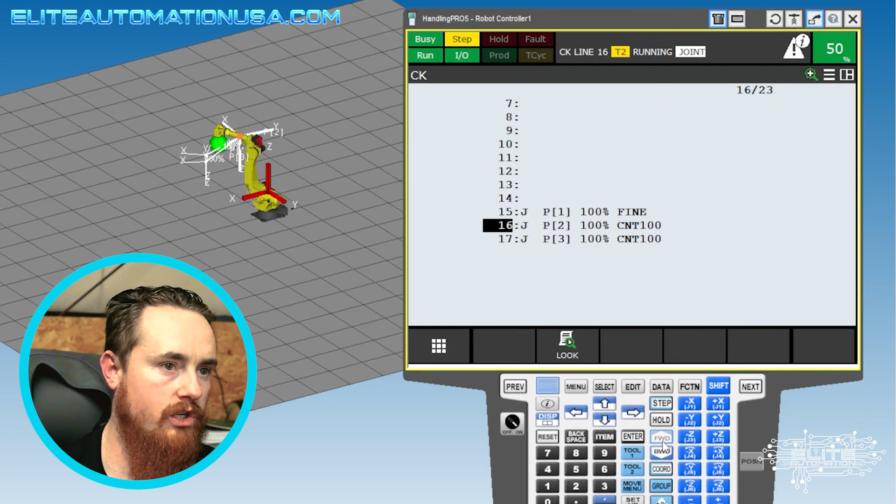It won't matter because you're forwarding. Oh okay, that's one of the nice things about forwarding is you can see everything that's happening. So you always want to forward through a program if you're testing it to see how it's going to react, unless you've already reached an experience level where you feel like you know what it's going to do.

Okay, so boom, now you're in the main loop. So you've seen it just jumped up there back to the top again. Right, okay, let's go check out the data, see what the data says.

Click your data button. Okay, go up to your register number 2 that's up there. Okay, so you can see it incremented up 1.

Number of placed pallets. What do you mean? You see your 1 right here, you placed one part. So what are you supposed to be? Huh, what is supposed to be? This is what it's supposed to be. Oh okay, I thought you meant like, okay.

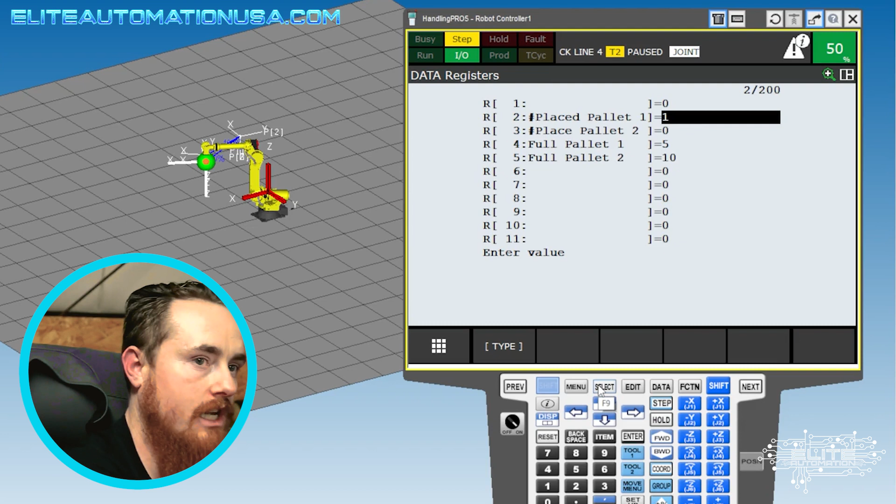Well okay, how many cycles have we run? Right, we ran 1 cycle. Okay, so this is incremented up by 1. I got you. Okay, so now we'll just go back into the program again and we'll run some more cycles. So we know we should reach 5, right? Because that's what this full pallet 1 is telling us, is 5. So let's just run through this thing, and let's run it to 4. So like 3 more times.

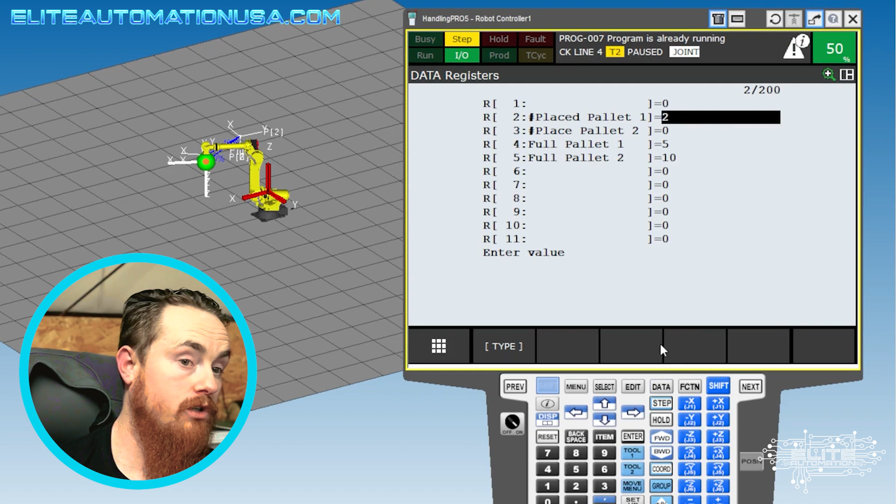So that's exactly what you're wanting to do. Like if you don't know what it's supposed to do, or you're trying to learn something or see how something's going to react, you just keep going back. You just keep trying, keep running the logic, and then seeing what the data tells you it's doing.

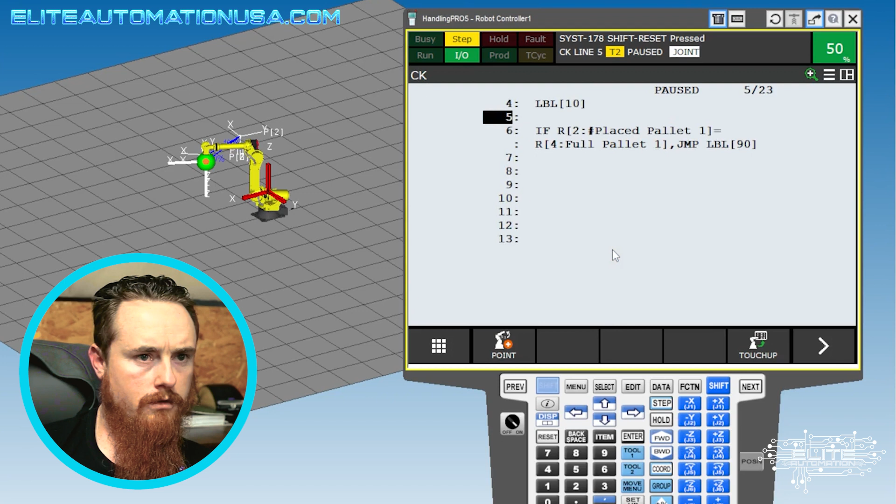Okay, so let's go ahead and run through it again. I think we were on 3, so this will put us at 4. Oh, you're not running through it. Yeah, you gotta forward through it. So in this one, you go step. Yeah, you're already in step. Hit forward. Yep. Forward. You should be at 4 right now. Okay, just forward. Yep, keep forwarding.

Now, after you get down to the bottom of this one, go slow. Okay. Again. Now, go check your data. Oh, it's a 5. Okay. So now we're going to go back to your program. If this part works correctly, it should execute. So just forward through slowly. Forward. Okay, do you see?

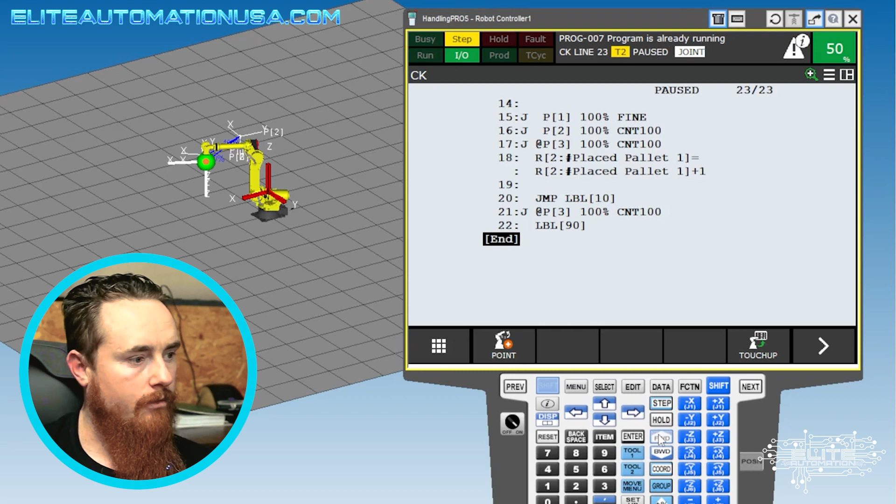So now we jumped out and jumped to label 90. Maybe this pallet's full, so now we need to fill up the next pallet. Or it might be wait till new pallet present, or whatever the next sequence in the process is.

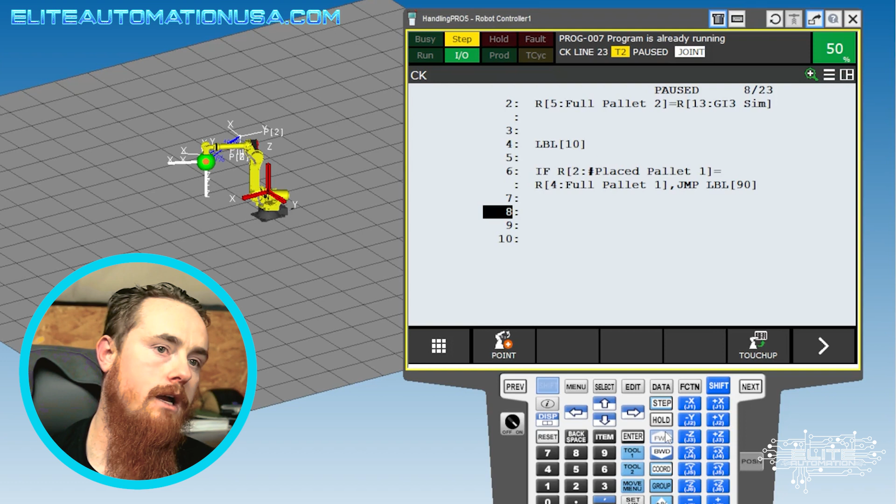After you've written something like this and you've gotten it proved out, one thing you can do is copy and paste it, or you can re-handwrite it all. This is not a lot, where maybe re-handwriting it makes sense. Or you can copy and paste it, especially if it's a lot of logic. The one problem with copy and paste, and why it's kind of frowned upon, is because there's a lot of things inside of here, like this register 2, this register 4, and if you forget to change one of these numbers, you've now created a bug in your logic.

And it'll do the thing, and you'll be looking at it, and you'll say, well, I don't understand, why is it not doing the thing that I want it to do? And then after an hour of trying to figure it out, you go, oh gosh, dang, I forgot to change that to a 5. You know what I mean? So that's why it's frowned upon to copy and paste.

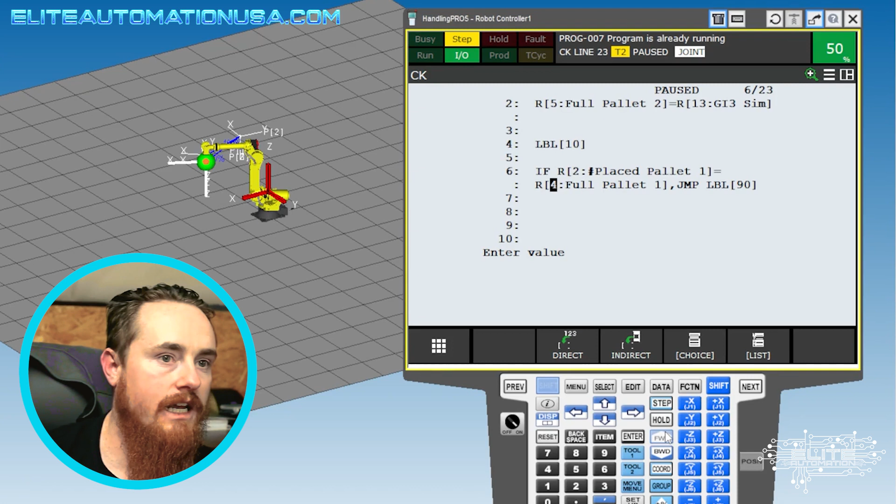As long as you're just meticulous about it, like if I copied and pasted these, maybe I'd write a note saying, okay, I copied line 7 and 8, or I need to change the values on 6, 7, and 8. Or in this instance, I just need to change the value on 6, so I'll make that note. And then I'll make sure that I come in here and change all the values I need to change.

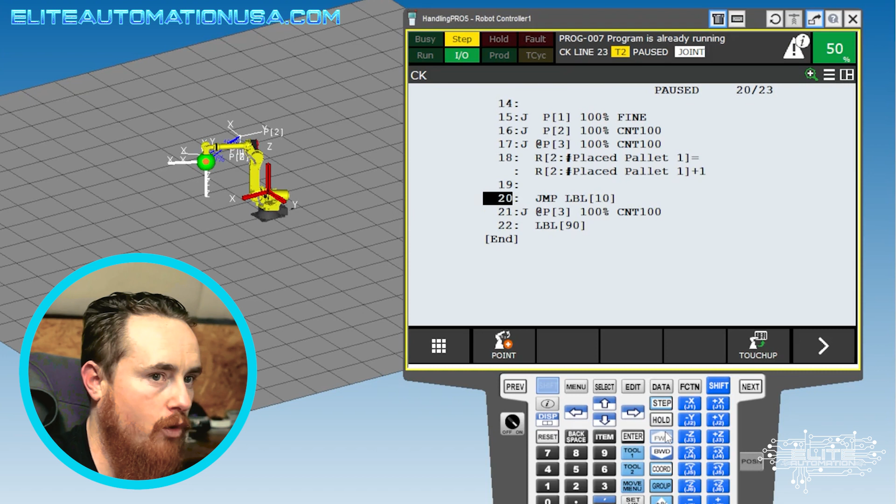One other thing to note here in the program is that this position was never ran. We're at this position because it's recorded as the same position as this position. They're both position number 3. But we've never executed this position because we either jumped back up to the top, or the code executed and we jumped to label 90. So if you wanted to get to this position, you never would, because there's nothing to get you in between these two

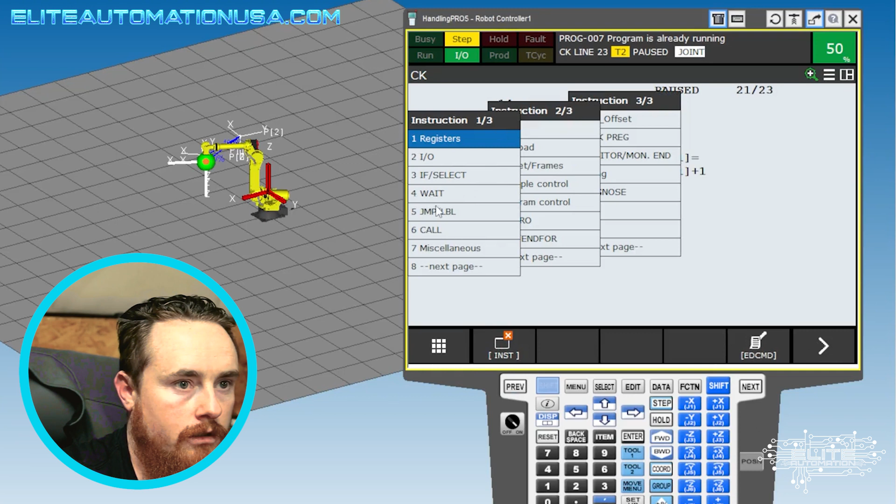instructions. If for some reason you wanted to run this point independently, you can add one more label above it. So let's use an example. Edit command, insert 3 lines, boom. So I've added some lines there. Again, good programming practice to always create segregation between instructions that don't go together. And I actually have too many lines here. Too many lines is bad too; you don't want big gaps. The amount of lines I have segregating something depends on how chunked I want to make the code.

Step, Ctrl Shift got me again. Okay, so I'm going to add a label here. Boom, and let's say we're close to the bottom of the program. Maybe we'll make this one 80, because we're close to the bottom of the program. Again, nothing jumps to label 80 right now, but we could create a jump or some instance that makes us call label 80.

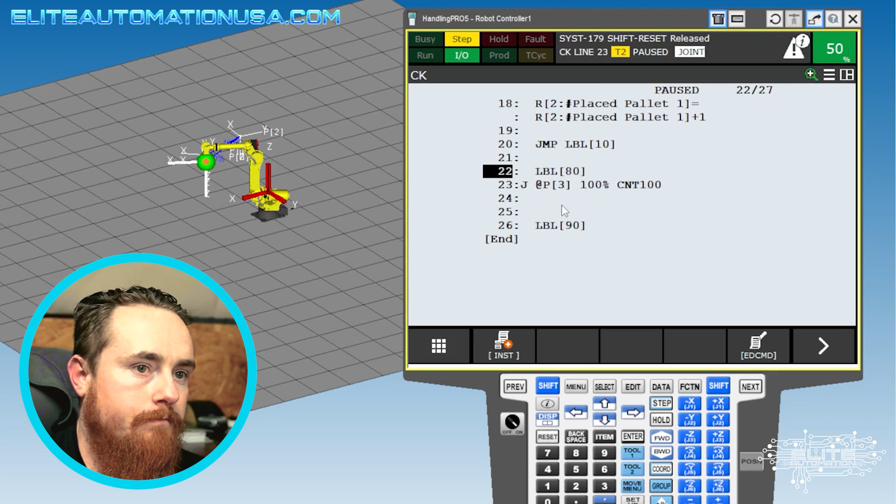And see, right here, we have too many spaces. So if I was to come back and clean up the code, I'd say edit command, delete, and I want maybe 2 line space there. Oh, there's too many lines. Edit command, 2. So now this code is, I'll say, cleaned up better, to where things are more organized.